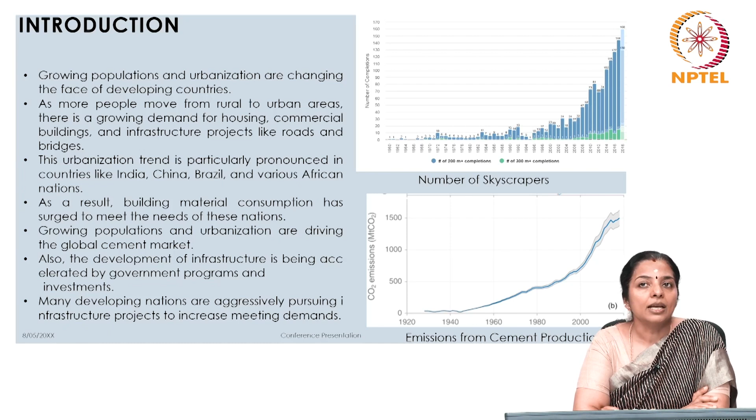As more people move from rural areas to urban areas, there is a growing demand for many buildings, especially housing, commercial buildings, and also infrastructure projects, such as more roads, bridges, railway stations, etc. In developing countries like India, China, Brazil, and some African nations, this urbanization trend is particularly very high and pronounced, and this has a direct implication on the requirement of number of buildings.

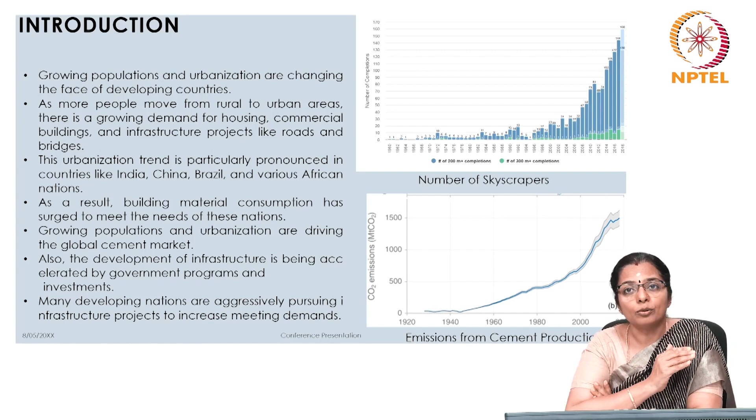So, growing number of buildings - you can see the trend here. Right from 1960, the number of skyscrapers shows an exponential increase, and that increase is significant in the last two decades, or rather one decade, from 2008 to 2018. There has been a significant rise in the requirement of skyscrapers, and more have come up in the world.

Because of this, the requirement of building materials has also escalated tremendously. In order to meet the demand of these skyscrapers, there is a humongous surge in the need for building materials. Growing population and urbanization are driving the global markets in terms of materials such as steel, cement, and especially concrete. It is said that after water, the most sought after material is cement in the building industry.

So that is the amount of demand for cement, and you know very well what cement contributes in terms of embodied energy - its embodied energy is extremely high.

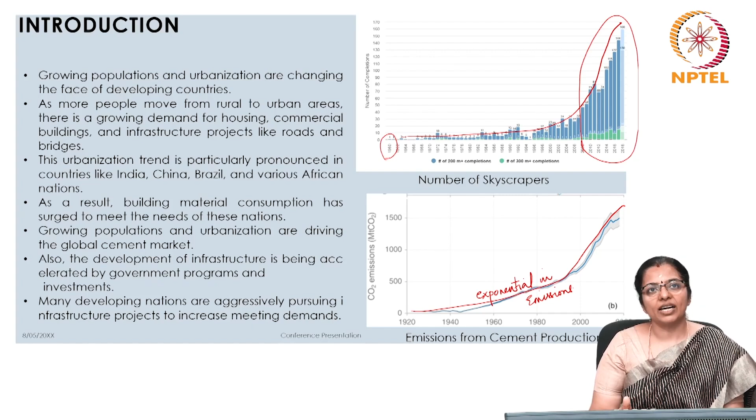If you are at all aware of the emissions being caused and the consequent global warming, then you have to be extremely aware of the building materials that you select for use in your buildings.

Now, developing nations are increasingly adopting eco-friendly construction materials in order to fulfill sustainability goals. In the COP, there is a commitment by every country about how much emissions they would cut in order to decelerate global warming - what would be the contribution of every country?

India has committed to at least 33 to 35% reduction in its emissions by 2030, and all other countries have also given their commitment. In order to do that, we need to understand alternate building materials which will cause less emissions.

Now, cement manufacturers are doing their small bit by developing green and low carbon cement products, and these are also finding a lot of place in the market. There are many ways in which they are doing this - sometimes the fuel that is used, they try to go for an alternate fuel, and so on.

But everyone is trying their bit. The way that we as architects, designers and civil engineers have to do our bit is by trying to understand which building material is going to give less emission and cause less harm, and therefore contribute to our sustainability goals.

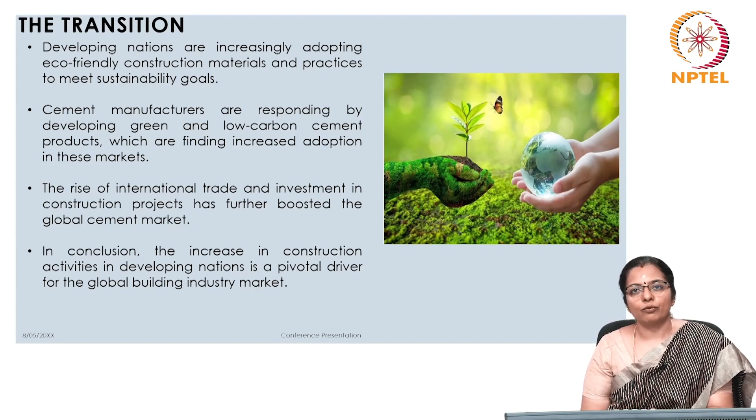The rise of international trade and investment in construction projects has further boosted the global cement market. I am just taking one example of cement here to say what all can be done and what all it causes. So this increase of construction activities in developing nations is a pivotal driver for the global building industry market, and this is also a global driver for the extensive emission that is being caused.

So what should we do? We need to go for a transition of building materials over time. We cannot stick to the same thing that we have been doing and expect any results.

So building materials, which are the essential components in construction, are pivotal in determining a building's life as well as quality. Now there has been a notable shift from predominantly natural materials to a diverse range of man-made materials and even sometimes composite options that we have been using in our buildings. We have also tried to explore biodegradable or imperishable choices.

The globalized nature of modern construction has transformed material sourcing from indigenous to international because of the advent of the international style of architecture around the 1920s, which said that all building materials are available throughout the world. Everyone has equal access to cement, steel, glass, concrete, and also the technology to use these building materials. So why not use these building materials all over the world?

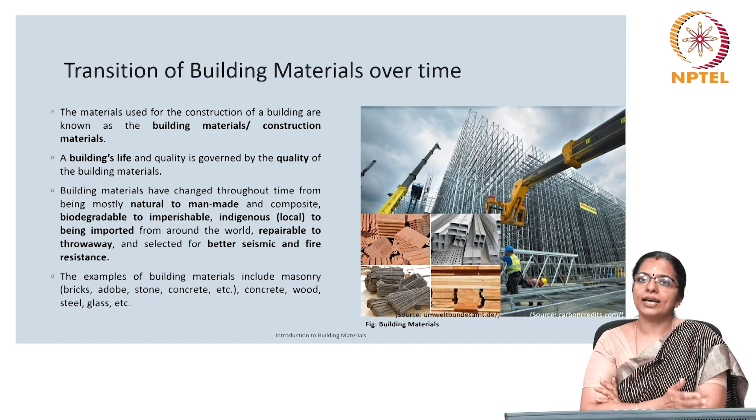Let us now look at the changing requirements of building materials. Now, an environmentally friendly, recyclable or high performing material that minimizes its effects on the environment and human health over the course of its life cycle - this is what we require.

So the building material has to be extremely environmentally friendly. It should not be emitting too much carbon dioxide. It should be recyclable and it should have low embodied energy. It must lessen the pollutants which are indoors and be specifically formulated from non-toxic, organic and natural materials. Otherwise it leads to a lot of health issues and health problems in the occupants. That is why even paints are going low VOC.

So these building materials must not only be eco-friendly in terms of environmental impact, but they must also cause no harm to the inhabitants. They must assist in rerouting indoor air quality, liability claims while satisfying customer demands and legal standards. So IAQ is very important to avoid sick building syndrome, and therefore the building materials that we select must also be supportive of it. The conservation of non-renewable resources and reducing the environmental impact must also be imperative.

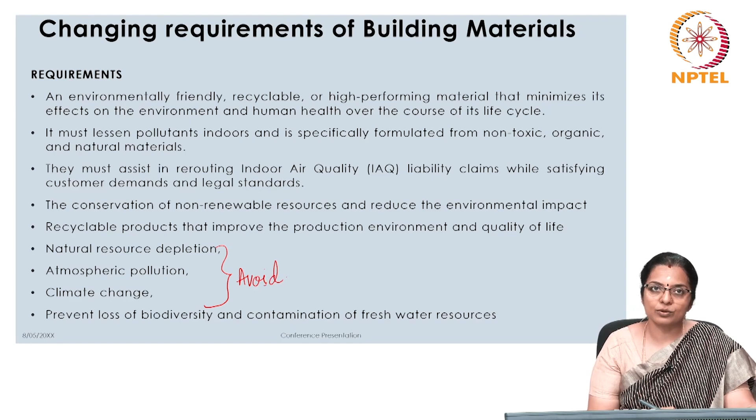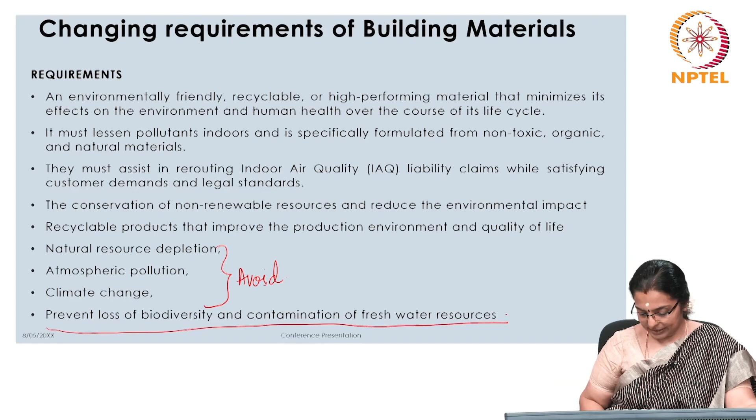They must not cause atmospheric pollution, and they must not contribute to climate change. They must also prevent loss of biodiversity and contamination of freshwater resources. So the building material choices must be dominated by the ones that avoid natural resource depletion, atmospheric pollution, climate change, and they must prevent biodiversity loss and contamination of freshwater resources. These are the major requirements that we should look at when we select building materials.

What must be the characteristics requirements of building materials? Now, green building materials are characterized by many of these factors.

They must be sustainable, derived from renewable or recycled resources, reducing reliance on finite resources. They must be highly energy efficient, with good insulating properties in cold areas, contributing to overall energy efficiency. So apart from being renewable or recyclable, with reduced reliance on finite resources, they must have superior insulation properties as well as contributing to overall energy efficiency.

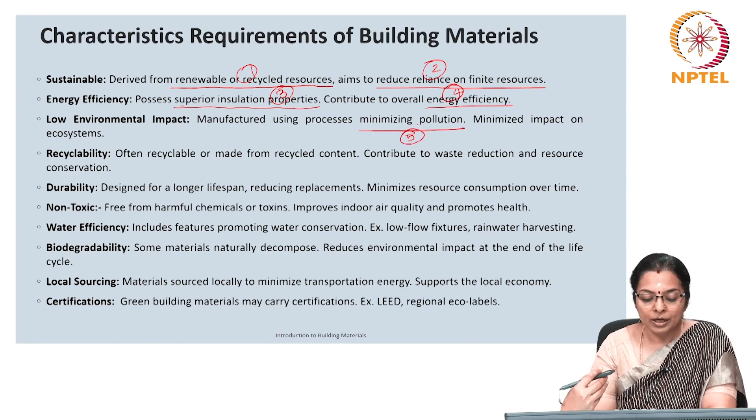They must have low environmental impact, meaning they must be manufactured using processes with minimum polluting effects. The process of producing the building material itself must not cause pollution, and they must have minimized impact on the ecosystem, so ecosystem damage must be minimal. The building materials must be recyclable, because recycling building materials will reduce waste and help in resource conservation.

Also, the building materials must be durable. They must be designed for a longer lifespan and capable of reducing replacement, otherwise the embodied energy of the building over its lifespan will keep increasing, which is not good, because you are pumping in too much embodied energy into the building, directly related to emissions. It should minimize resource consumption over time.

So have building material choices which need less maintenance and upgradation. The building materials must be non-toxic, free from harmful toxins, and must improve indoor air quality. The building material could improve IAQ, or at least should not harm the health of individuals by creating poor IAQ.

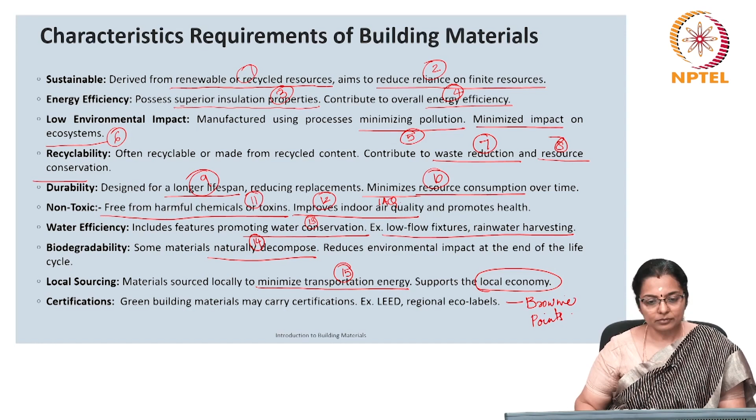Let us now look at the significance of building materials in green building. In the context of green building practices, understanding the importance of building materials is very crucial, because there is a nexus between urbanization and the heightened demand for building materials. This is also driven by growing urban population, so urbanization and material demand drives the increased demand for building materials.

The demand for building materials becomes more, directly linked to the growing global urban population because of urbanization. Also, non-renewable resource concerns are high, because this industry heavily relies on non-renewable resources like coal for energy for its production. This raises alarms about depletion of non-renewable energy resources and the need for sustainable development in construction, which also drives us to understand about the various building materials.

There are issues with conventional building materials, because growing global awareness highlights the hazards from conventional building materials, especially in terms of the environment, raising an alarm for us, considering that we always need to reduce emissions and global warming. We also have to consider the importance of reducing toxicity, or having nil toxicity indoors, and improving our indoor air quality.

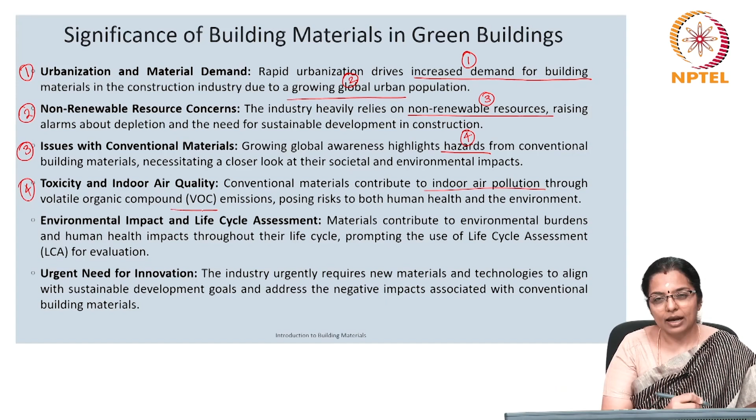Conventional materials could contribute to indoor air pollution through VOC emissions. These happen especially through paints, sometimes even through carpets. So selection of building material for paints and carpets becomes very important, as they pose a risk to both human health and the environment.

We must also understand the environmental impact and life cycle assessment. These materials contribute to environmental burdens and human health impacts throughout their life cycle, so we need to understand how life cycle assessment can be used for evaluating the environmental impact.

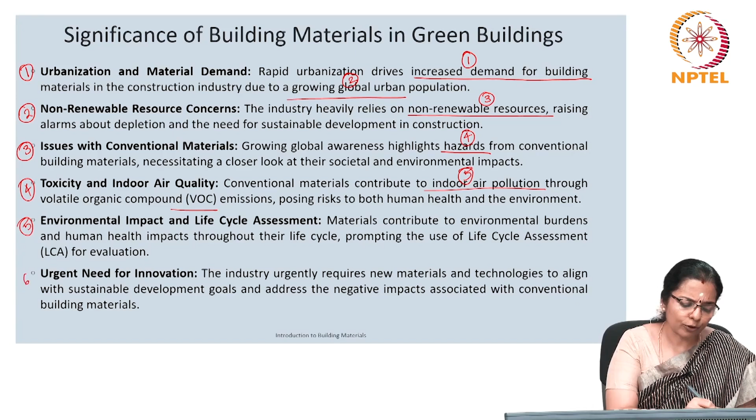Then there is an urgent need for innovation, no doubt. The industry quickly requires new materials and technology to align with SDGs and address the negative impacts associated with conventional building materials. This innovation is imperative to align the industry with sustainable development goals, so that we address the adverse effects associated with conventional or modern building materials.

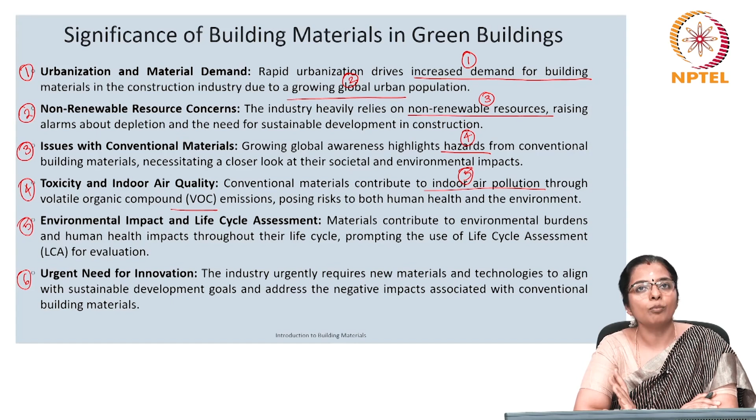Now, let us look at the market requirement.

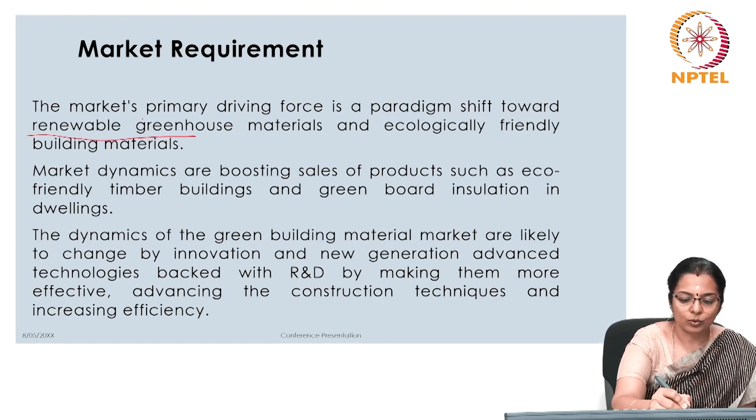The market's primary driving force is a paradigm shift towards renewable, greenhouse, and ecologically friendly building materials. There is a demand in the market that we need to shift our choices of building materials to renewable materials as well as ecologically friendly building materials.

Why is this coming from the market? Because green building certification is also becoming very important. So it is necessary for us to have green building materials in order to go for certification.

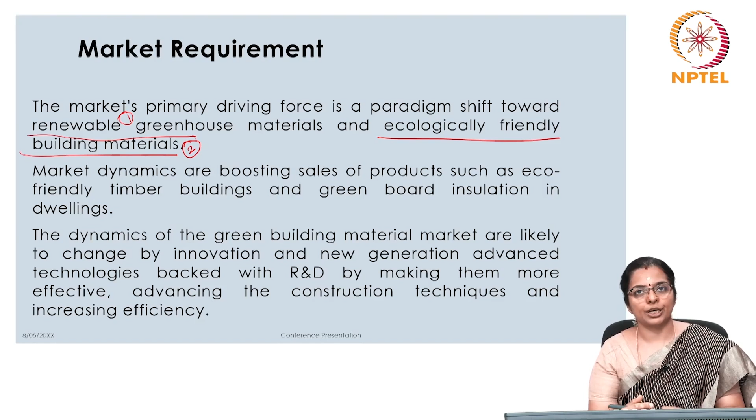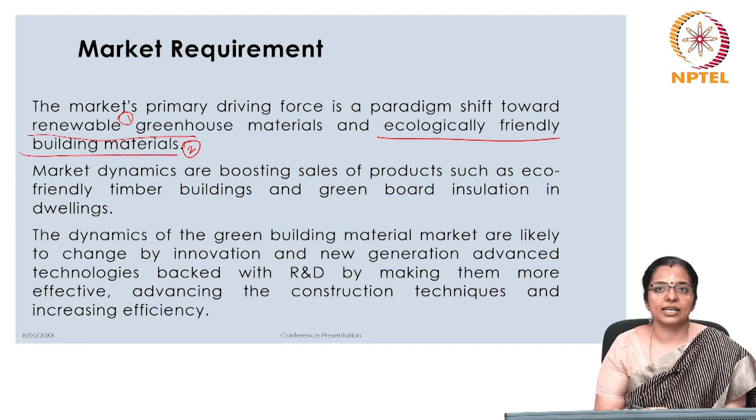Now, the market dynamics are boosting sales of products such as eco-friendly timber or green board insulation in buildings. The dynamics of the green building material market are likely to change through innovation and new generation advanced technologies, which must be backed by research and development, making them more effective, advancing construction techniques and increasing efficiency.

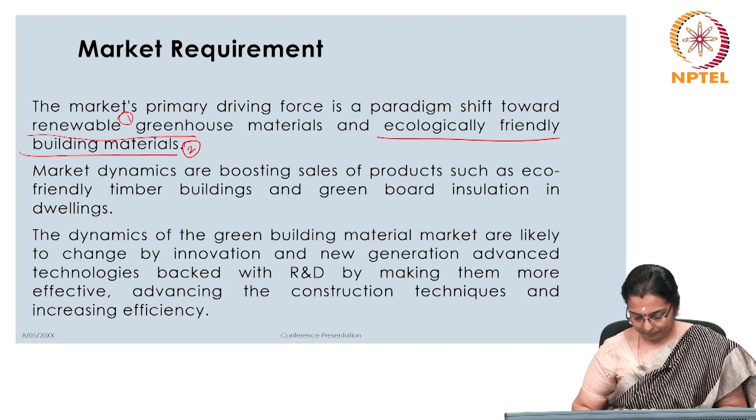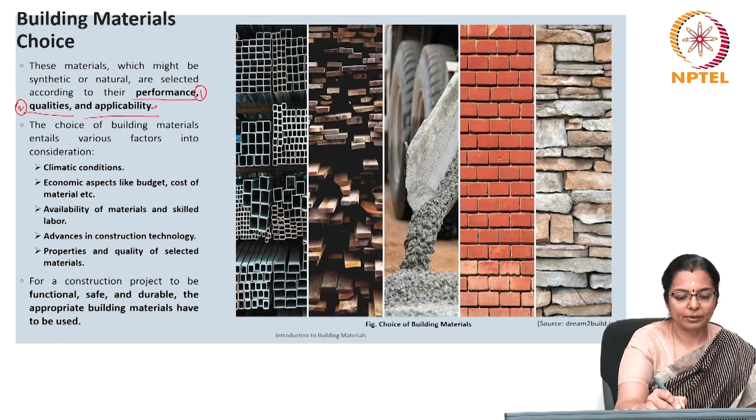Now let us look at the choice and selection of building materials. The selection of building materials is a critical aspect of construction, with choices guided by factors such as performance, qualities, and applicability. The choice of building materials considers various factors such as climatic conditions.

This is what has happened with the internationalization of buildings. I use this word because this is where we started using modern, so-called modern building materials with very scant respect to the environment and the climate of that place. Whether it is a hot and dry climate or a warm and humid climate, we ended up using the same building material. Therefore, the choice of building materials now must entail various factors such as climate.

The economic aspects of budget: what is the cost of the building material? Will a concrete block cost the same as a mud block? When a mud block is good enough to compensate for a place where a concrete block is used, economics becomes very important.

Availability of materials and skilled labor is also important. We are seeing that sand is getting depleted as a resource, so the availability of material is reduced - I am just giving sand as an example. There must also be availability of skilled labor. When you choose a building material, don't choose one that needs so much exquisite skilled manpower to execute, because then it will lose its popularity over time, as the building will not progress for lack of skilled labor.

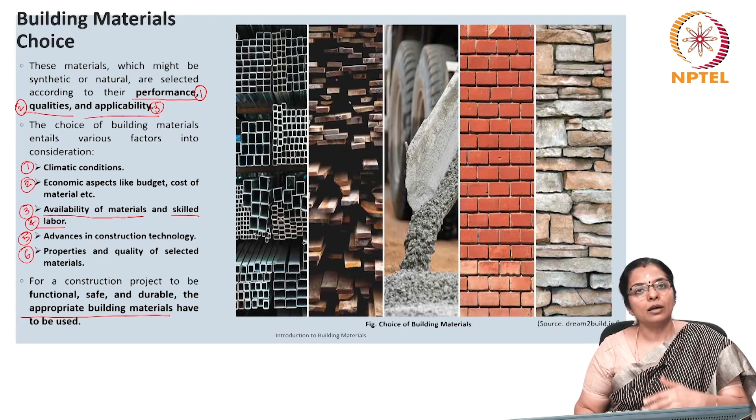So we have come to understand that there are certain parameters based on which we choose building materials. These building materials are an integral part of architecture, and they play a crucial role in determining the visual appeal, structural stability, and historic value of a structure. The choice of building materials is influenced by various factors such as the site where the building is going to come up, the nature of the surroundings, and the type of building.

Building materials establish a relationship between visual quality and structural stability, which is essential in creating a structure that is both aesthetically pleasing and structurally sound. This selection also highlights the theme and concept of the design. You cannot design a building that produces eco-friendly building materials, but whose production comes from a building with very high embodied energy or a lot of emission. So certain things have to be correlated in spirit.

Different materials can evoke different emotions in people and convey different messages. For example, the use of wood in a structure can create a warm and grounded feeling, which can be very inviting.

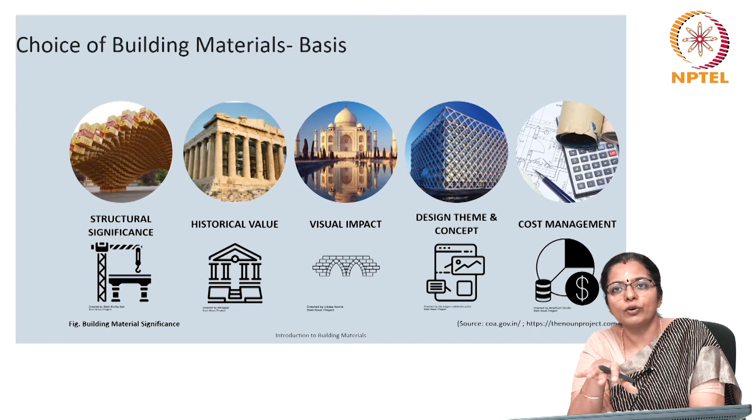The use of exposed concrete can create a very industrial, grey, modern feeling, because exposed concrete is one of the characteristics of modern architecture, which is something new to Indian vernacular architecture. So the selection of building materials can enhance the overall ambience of the building, creating a cohesive and harmonious structure.

Building materials also play a crucial role in determining the appropriate site for a construction project, because their availability and suitability in design can influence the location. For example, if a project requires a specific type of stone, the site selected must have access to that stone. Otherwise you increase the embodied energy through transportation energy, even though stone is a low emission material compared to concrete or steel - that benefit gets compensated by increased transportation energy.

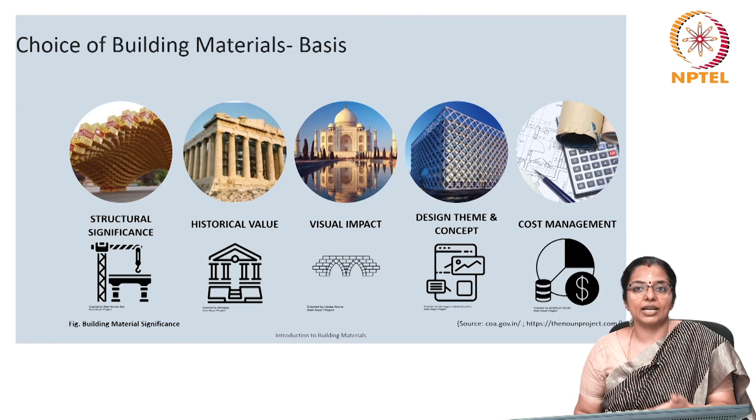The availability of building materials can also impact the budget of a construction project. Furthermore, building materials help trace the evolution of the art of construction. The use of different materials throughout history has influenced the development of architectural styles and techniques. The study of building materials can produce insights into the cultural and historic values of a society and the evolution of construction practices - an example is the Brihadishwara temple, and the kind of ambience it creates, and the cultural and historical ethos it has for society.

I will now get into the main aspect, which is what we will follow: what are the classifications of building materials? Building materials can be classified based on source as natural building materials - materials found in nature requiring very minimum processing, like mud or wood - whereas synthetic building materials are man-made, manufactured materials that involve processing, for example steel.

Based on composition, we can have organic materials and inorganic materials. Organic materials are raw materials that require very little chemical change, for example sand or biomass - very minor intervention, you just remove the pebbles or things you do not need.

Whereas inorganic building materials are processed with added components to enhance their performance, something like lime. We could call this classification based on composition.

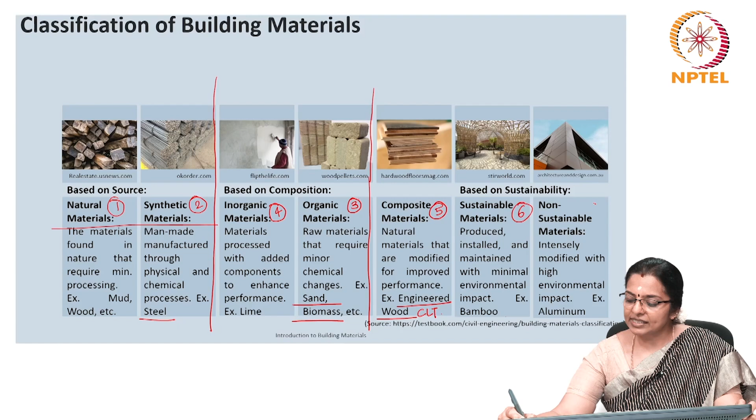You can have sustainable building materials, which are produced, installed and maintained with very little environmental impact - for example bamboo. And you can have non-sustainable building materials, which are intensely modified with high environmental impact - these can be cement, steel, glass, concrete, aluminum and so on.

And finally, we move on to building material classification environmentally, because that is the crux of this course. Here we will classify building materials as vernacular building materials.

These building materials have been used for a very long time and have proven to be useful to human beings in that particular context. These are mud, stone, thatch, bamboo, some binders, straw bale and quarry waste.

Over time, when there was a kind of awareness about being environmentally sensitive, we started developing what we call alternate building materials. Alternate building materials use certain things considered as waste, and because the earth is not able to sustain that much dumping of waste, these are incorporated into building materials to produce what is called alternative building materials.

Those could be fly ash, furnace slag, cross laminated timber, construction demolition waste, phosphogypsum, hempcrete, papercrete, aerated concrete, and alternate aggregates.